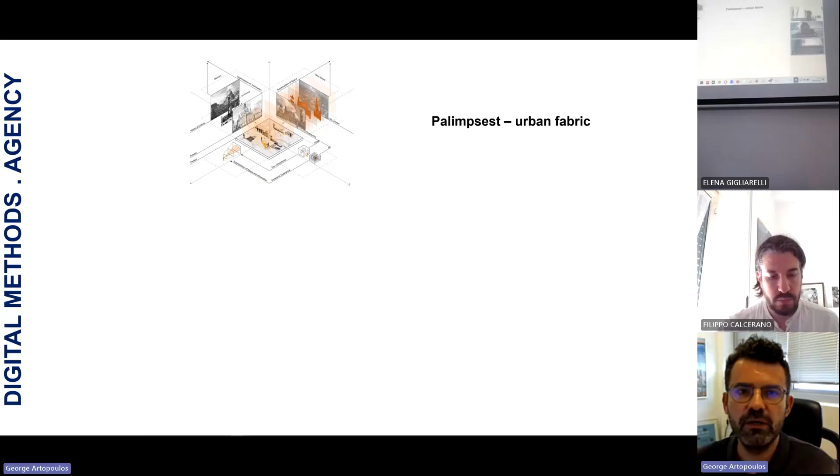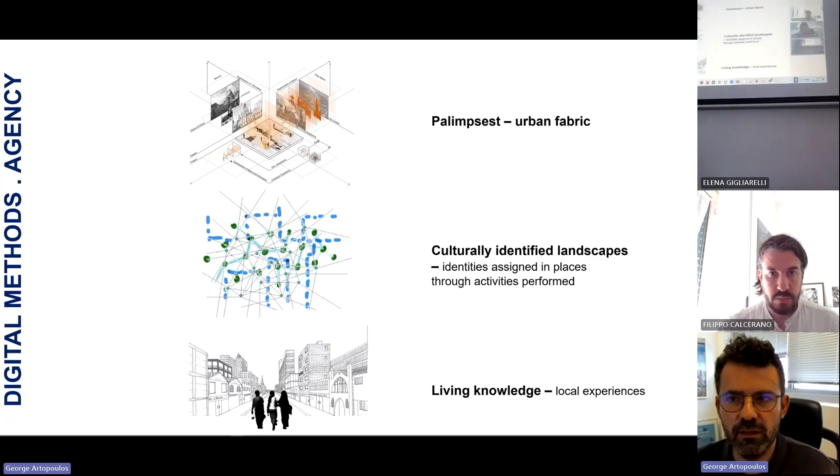In this context, at the Virtual Environments Lab, we work through three lenses, or three scales, and we operate to drive new transitions of our heritage-scapes through these lenses. The first is where we look at the historical and geometric conditions of the urban fabric. In the second, we aim to study culturally identified landscapes, while in the third, we focus on capturing local living knowledge.

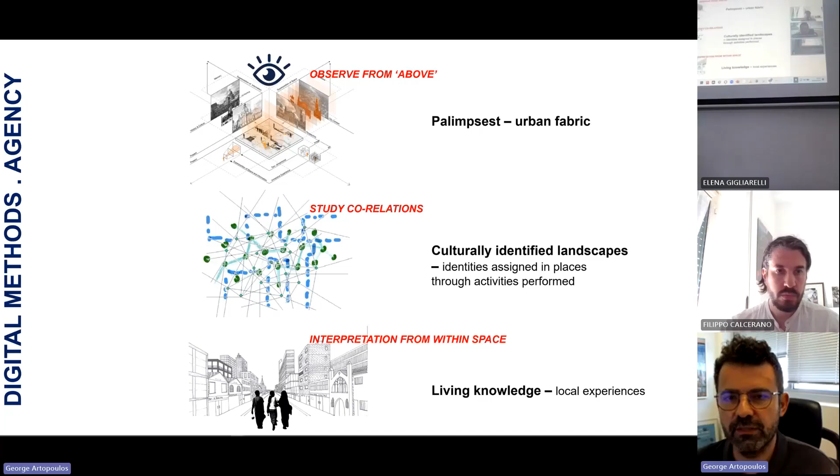To do so, in the first case, we observe from above. In the second, we study the establishment and emergence of networks of places and the interactions among stakeholders in space. And in the last one, we implement methods that assist interpretation from within space.

These three focal points drive our research, which is conducted in terms of the multi-scale observation of the urban fabric, the application of ICT tools to enable on-site participation for eliciting information, and the implementation of novel methods of co-design.

There is also a third thrust of activities about on-site co-design operations that I will skip today to focus on the first two. Of course, in everything we do, we understand that our study of built heritage spills over and engages understanding of the intangible aspects of heritage.

Hence, we have been working with Elena on the promotion and creation of the Archetico Working Group. I will start my presentation of these experiences specifically with an example of multi-scale observation.

Before sharing this example, I want to remind us that in the last several years, we can identify in the literature a shift in focus on policies in heritage — a shift of focus from looking at the object to looking at landscapes. This is very important for our research, because we propose that any documentation of a heritage object should include information about its context and environment.

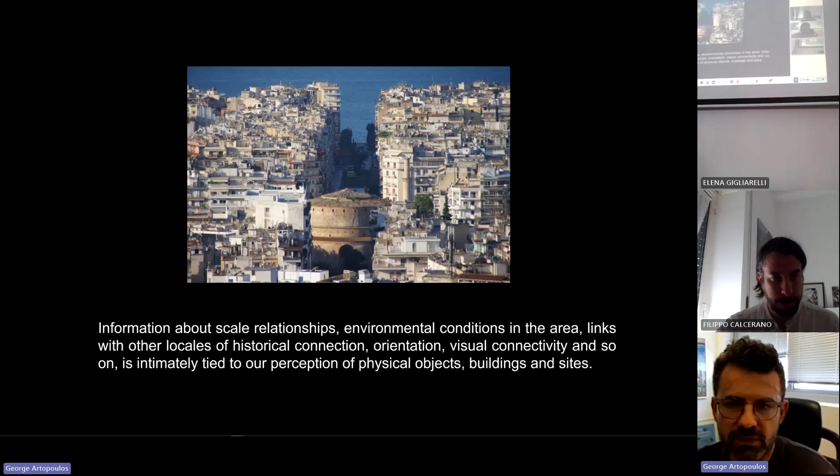Looking at the market today in terms of how we can facilitate this approach to studying heritage, in particular urban heritage within its context, we can see quite a few efforts in developing digital platforms that focus on 3D modeling and real-time simulation of urban environments. We, of course, fully embrace the concepts and ideas around digital twins in cities, etc.

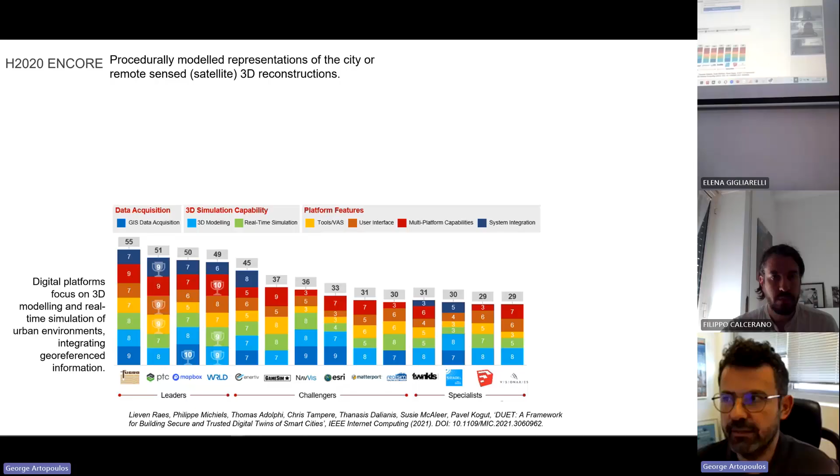There are other efforts that rely mostly on more procedural generation of the urban fabric using AI and remote-sensed reconstructions, as well as initiatives at European scale that focus on knowledge extraction and data integration in the context of city-scale reconstructions and modeling.

But we have identified that there is a gap in terms of how we can facilitate the authorities and all the stakeholders in monitoring heritage sites of bigger scale and historic neighborhoods. This is a very difficult challenge, and I will explain why further on.

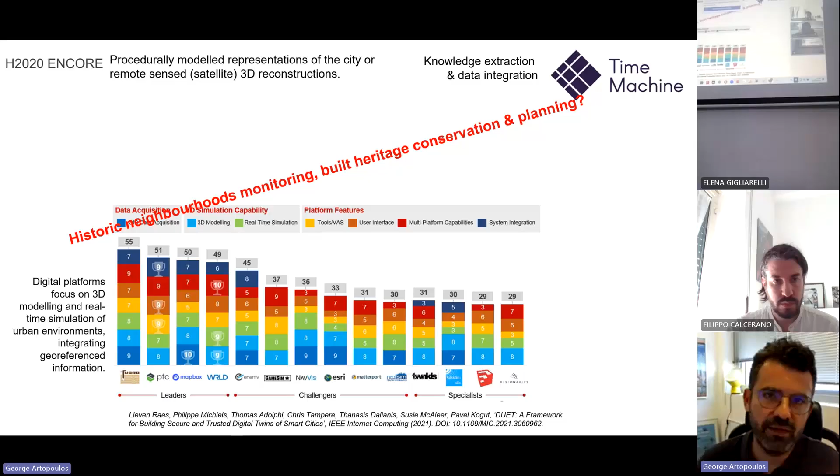In addition, we identify that there is a lack of quality open 3D data for city management, in particular about historic cities, as this has been reported in the policy paper, the white paper that was the basis for the European Collaborative Cloud for Cultural Heritage framework that was recently released.

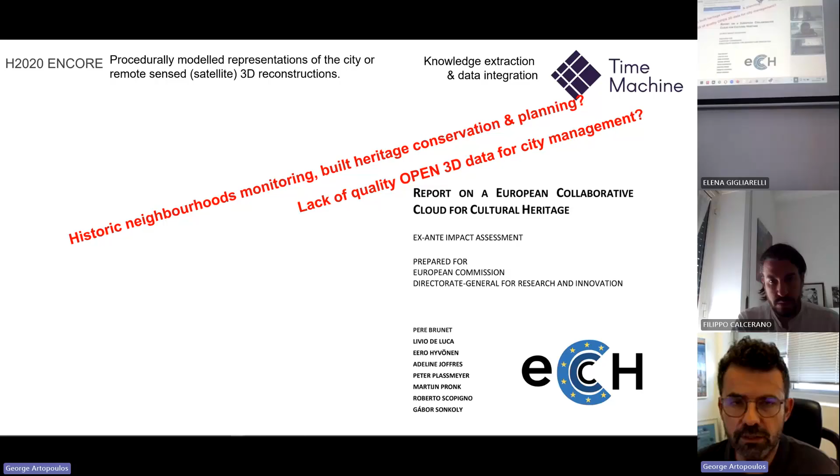If you will allow me, I will proceed to sharing with you this experience that I believe can be very relevant to the discussions you will be having in the following days in the workshop. So this is a reality — our reality here in Cyprus.

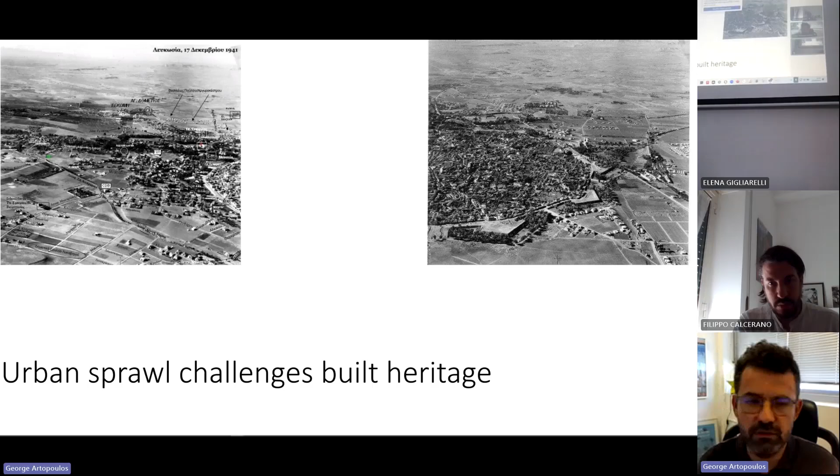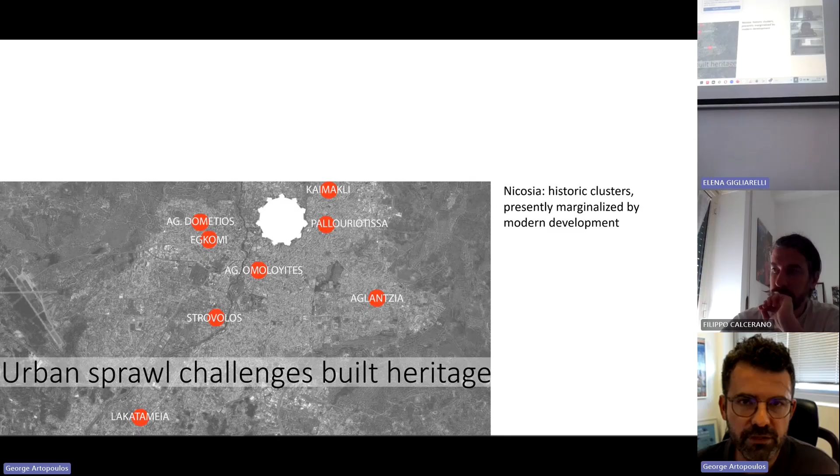What you see is the historic city of Nicosia, where the urban sprawl has introduced a lot of challenges in the management of the operations of the municipalities, of the public space, and of the building stock. All the red dots you see on the slide are satellite villages to Nicosia that have been integrated into the urban fabric of the metropolitan territory of the city with its expansion, with its sprawl.

We have been working with the municipalities to develop time-machine reconstructions of the sites to facilitate understanding of this expansion. But we have recently understood that if we want to really facilitate the preservation and safeguarding of this heritage, a different approach is required — one that would allow us to integrate many different datasets generated by different disciplinary backgrounds and bring together different scales.

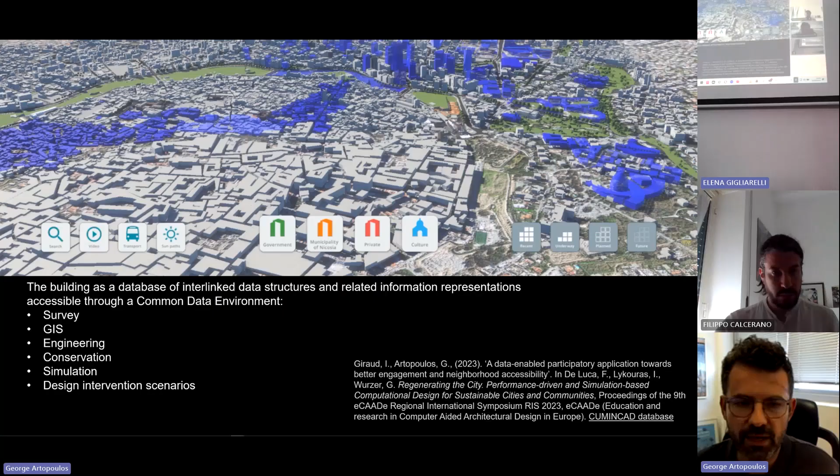This is the big challenge we are facing today: how to integrate these datasets, and how to bring together knowledge about building provenance for conservation, state analysis, renovation and reuse, data standardization, and the definition of data generation procedures through documentation and instructions, so that we can comply with any effort of standardization, and of course handle this digital information.

So what we did was bring together research organizations, SMEs, ICT companies, with the stakeholders of the city like the town planning and housing department of the government, municipalities, and the Department of Antiquities, together with professional bodies such as ICOMOS and ICOM, to talk together and understand how we could tackle this problem.

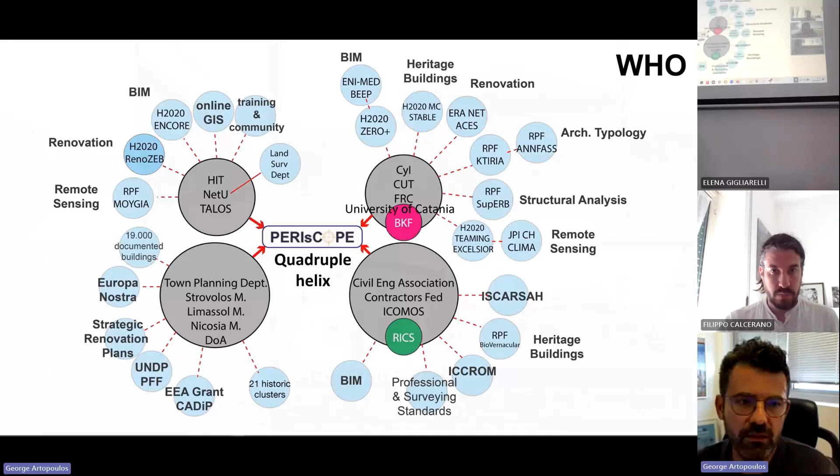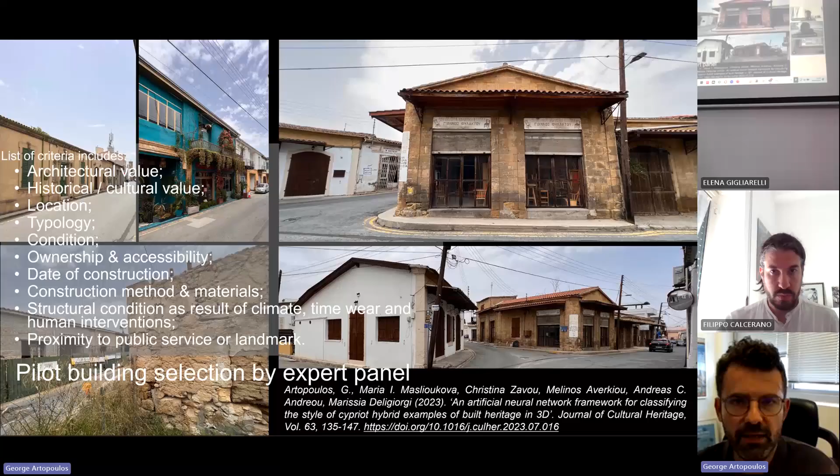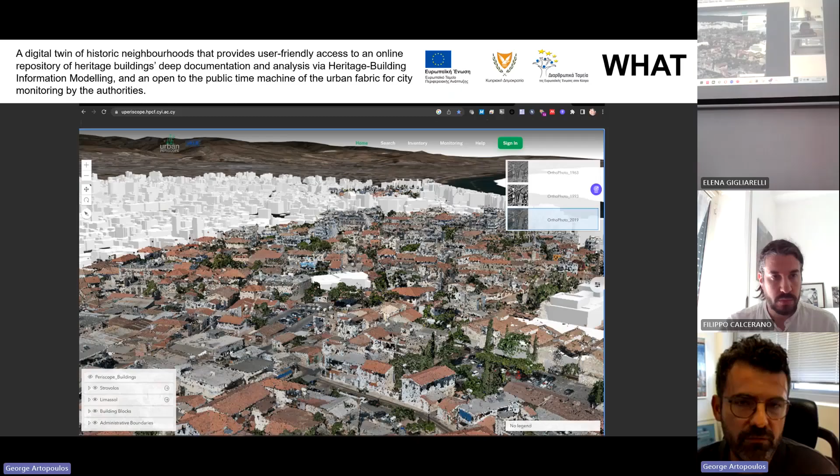We studied specific sites and buildings that were selected carefully to meet certain criteria, in order to experiment in the production of a very integrated portal — a platform, a screenshot of which you see here — that would enable authorities to monitor the development of the city in an open and easy way, and provide building owners access to knowledge about the value of their property, facilitating the valorization of heritage. This is a very important activity and initiative for cities like ours.

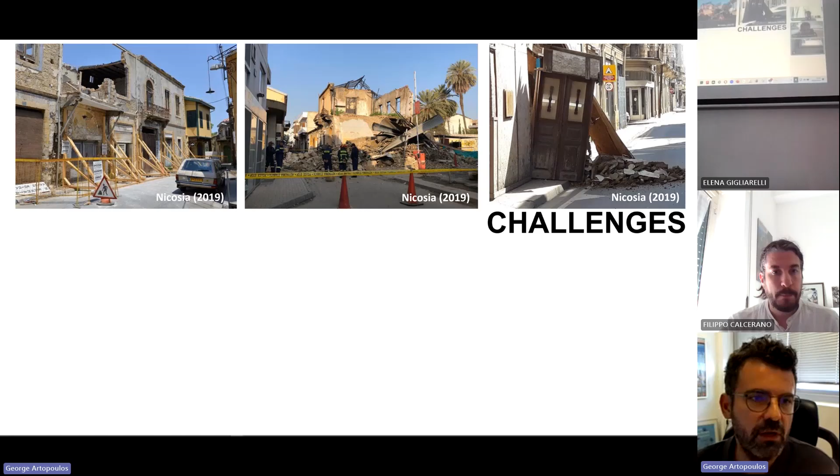You can see here the results of decay and neglect by human activities, and the impact of climate change, which is not very different to the results of an earthquake.

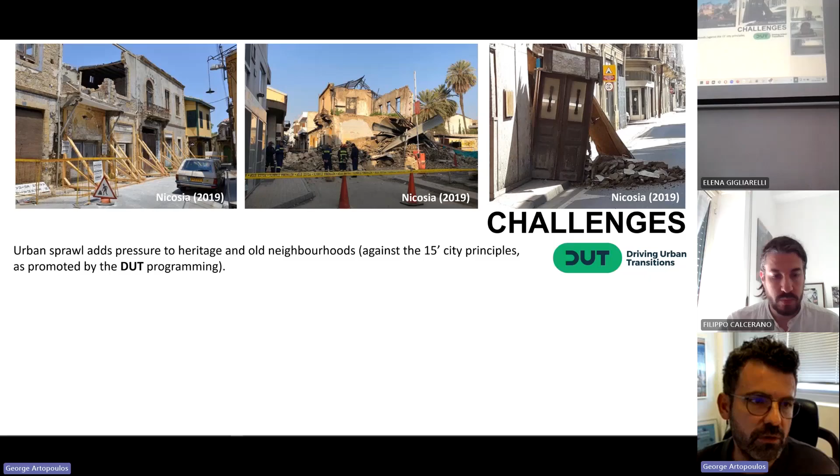As I briefly mentioned, the challenges we wanted to address regarded urban sprawl, the loss of heritage buildings by human neglect, climate change, and international real estate pressures, and of course the identified need for building renovation if we were to achieve the EU Green Deal goals.

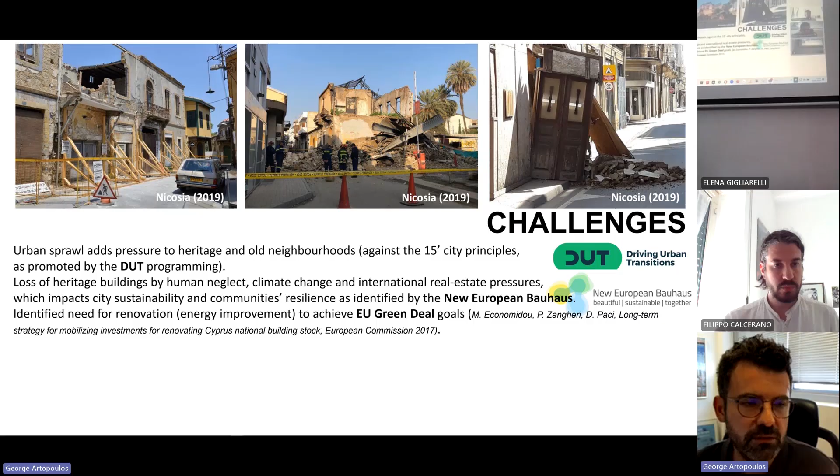In this environment we understood that there is a gap. The gap includes, first and most important, that authorities lack access to data and tools for monitoring, at least in our not very rich, so-called second and third tier historic cities, which do not have the resources to have a digital twin of their city and 3D cadastral data. Professionals also lack access to building and urban data, because it involves a lot of labor, it's costly, and they lack the know-how.

Even in terms of creating this platform, one would identify challenges with regards to scalability and sustainability, as any such tool must be user-enabling in everyday operation. And of course, most important, user acceptance of the platform, so that any target user group would not be afraid to use it, including concerns over data ownership, privacy, and security.

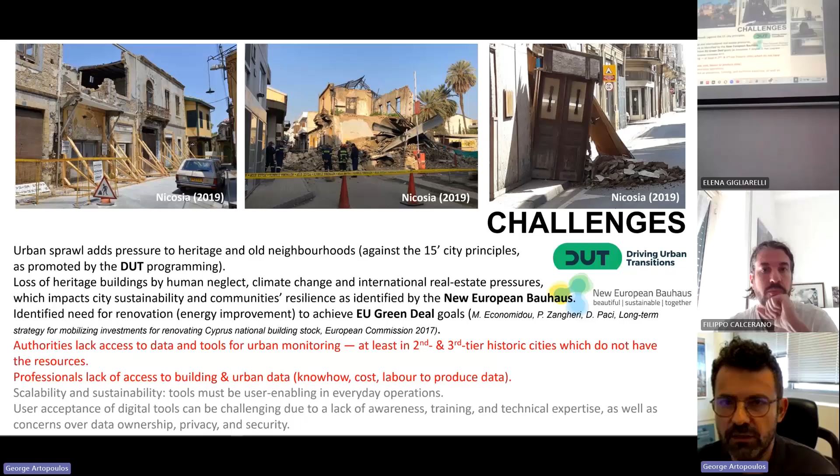So we overcame these challenges by producing a series of requirements for restoration and renovation, and guidelines for the users of this platform. We made sure that we would produce quality data sets respecting international standards, and we would also facilitate multidisciplinary study of the heritage assets, bringing this knowledge together with information of different scales.

And I will show you in a while how we did this. A key point for us was that we set up the whole process so that we would incrementally develop this platform as a tool together, through co-design sessions with the identified target user groups.

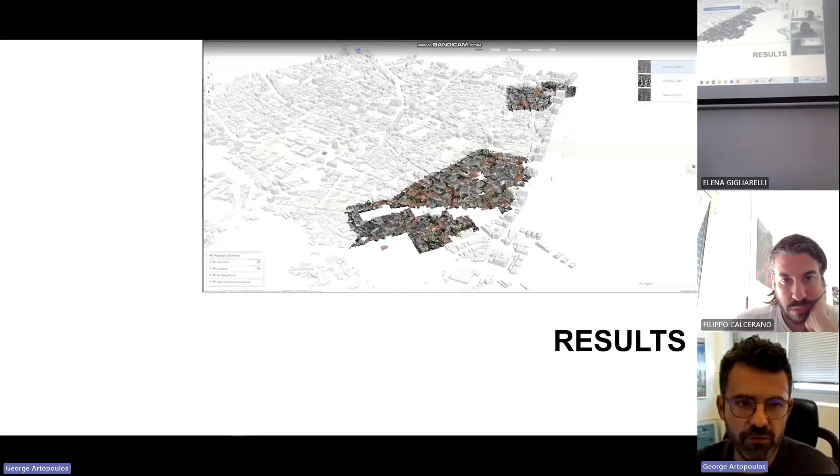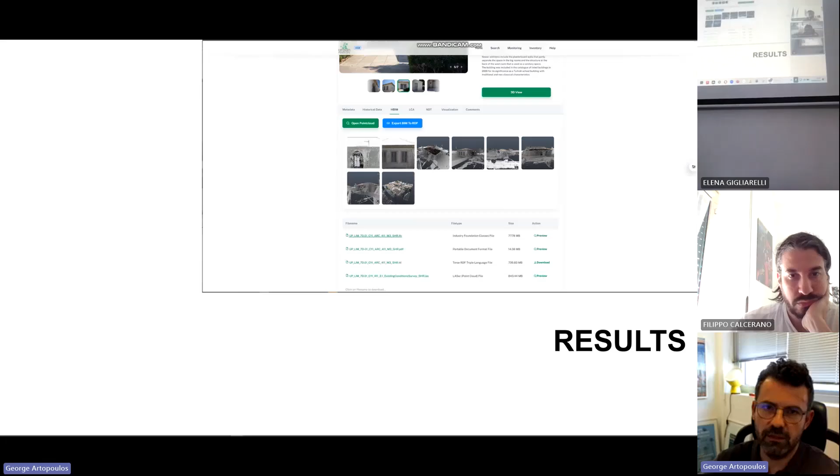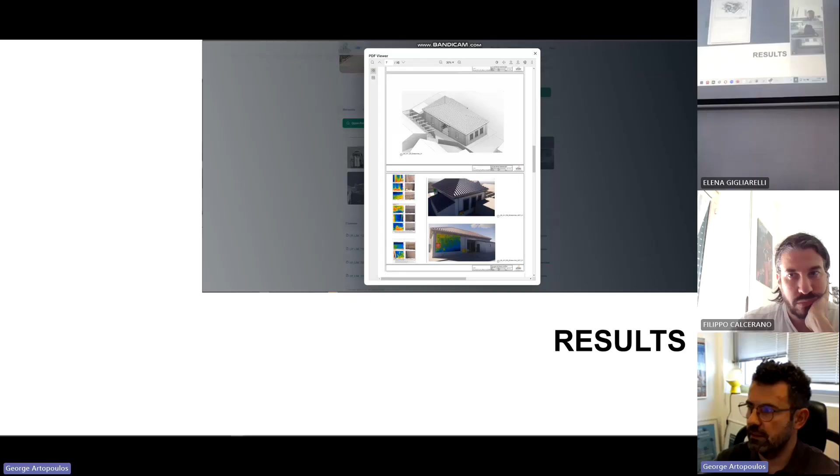I will quickly take you through this platform now, through this pre-recorded video. The platform is available online. You can see here how a user can select a building asset from within a 3D GIS environment, a representation of the neighborhoods, and they can access information about the building conservation state analysis, and a series of documentation of the building, and the necessary drawings that any architect would require for the study of the building.

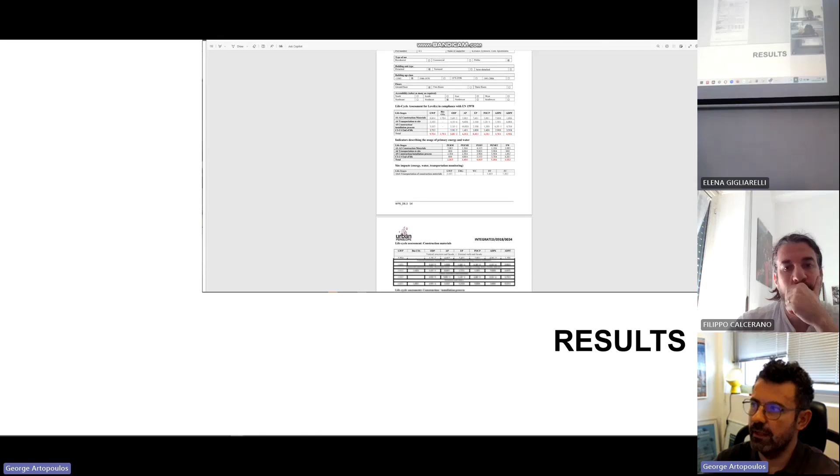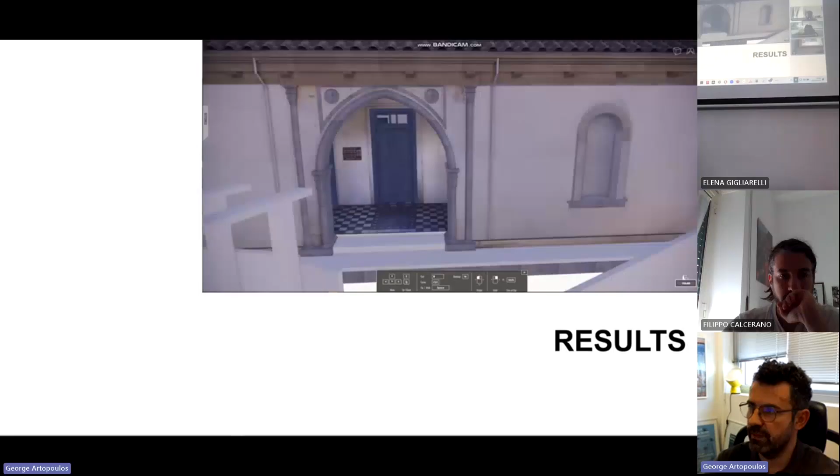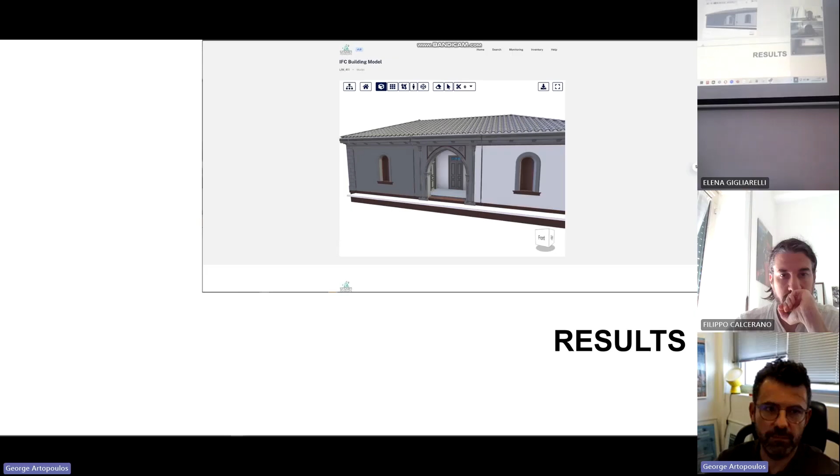As well as access to the results of non-destructive testing, and different versions of visualizing the asset through different interfaces. This is Enscape, for example, which allows the user to change the time of day, and therefore to see the impact, or show clients the impact of lighting on the proposed materials, and of course access to the IFC file.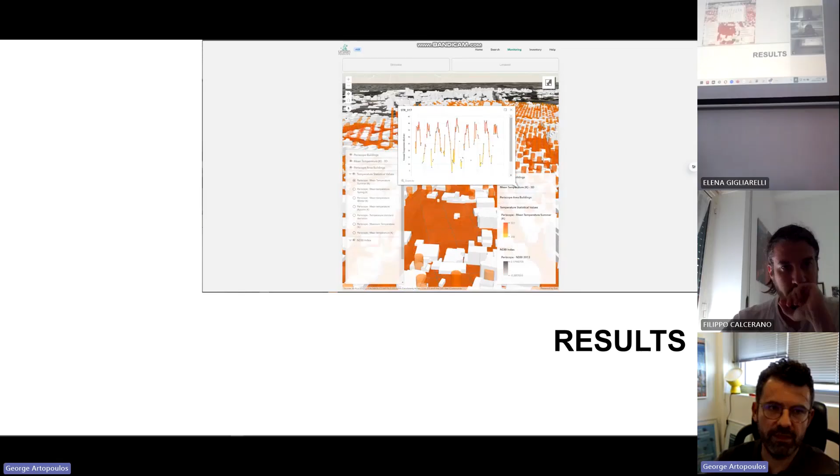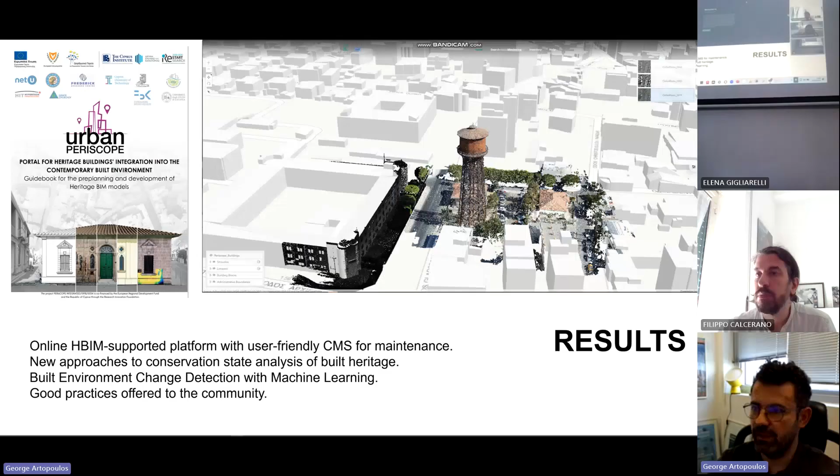You briefly saw that we included a comments section in the platform, so that the public can add information and share information about specific buildings. And what you see here is the visualization of information we collected through remote sensing about land surface temperature, about the neighborhood and the building, as well as documentation of the whole process, and the playbook we produced with guidelines and instructions for generating the data sets and uploading them to the platform.

As a result, and trying to connect with the previous presenter, we succeeded in attracting the interest of the municipalities and the town planning and housing department, who were partners in the project, and are now convinced of the value of this approach, using HBIM in an integrated workflow that is accessible and available for their officers through a simplified interface for monitoring purposes, for the whole process of getting permissions for building conservation and renovation.

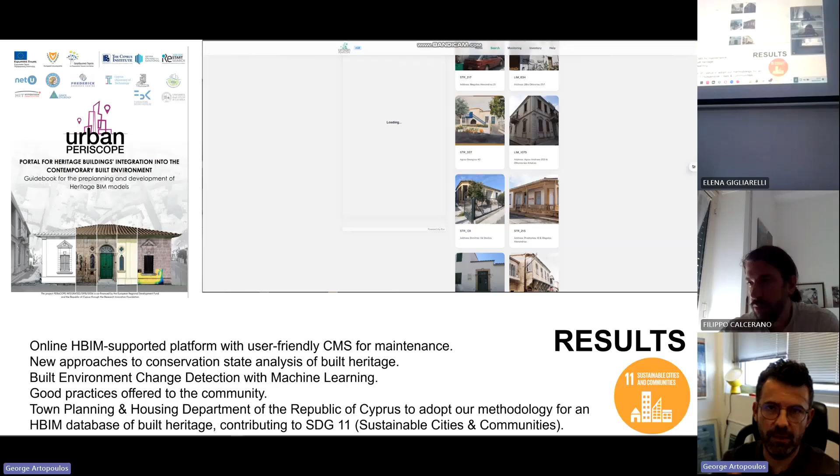And they are in the process of enriching this platform with new data sets. And of course they have started discussion about updating their policies and operations to see how they could include BIM files in the whole building permission process.

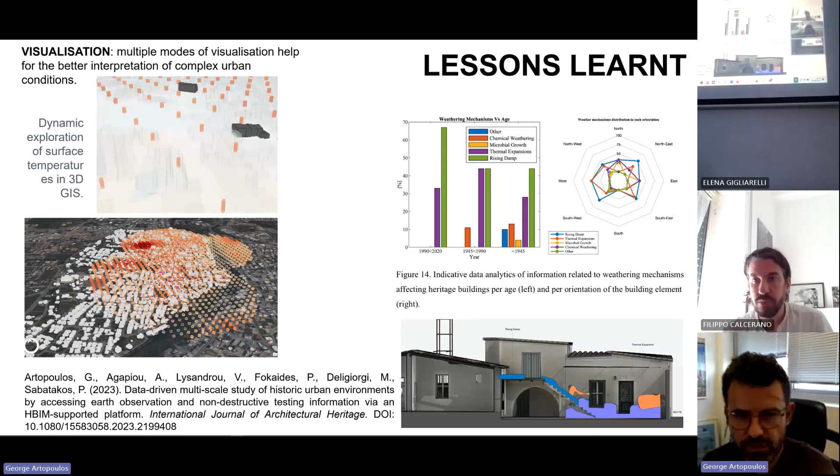Lessons we learned through this include the value of visualization, that multiple modes of visualization can help for better interpretation of complex urban conditions. You can see here the bringing together of environmental data from the neighborhood with the results of conservation state analysis and the interpretation of specific issues identified on the structure of the building.

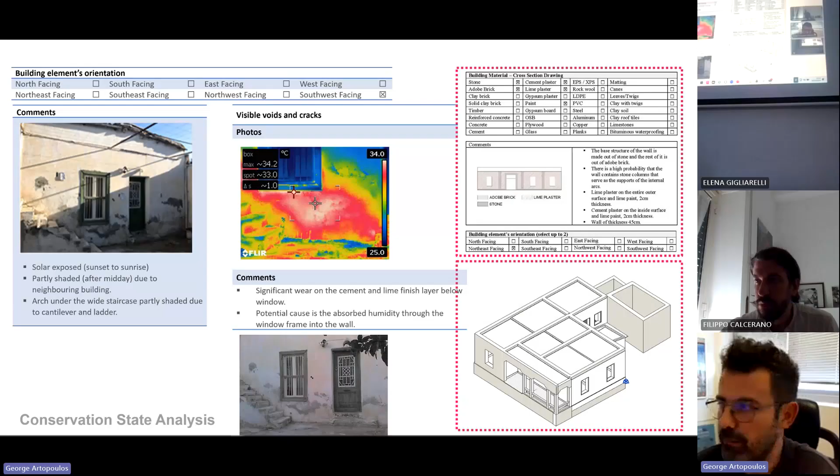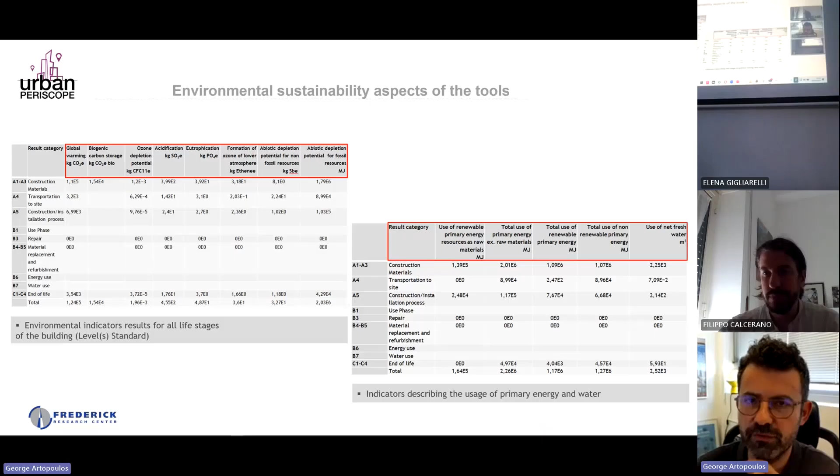And of course, for doing that, we implemented all the necessary practices for conservation state analysis, as well as experimenting with a better understanding of the environmental impact of heritage buildings, which is a very difficult task, to come up with a life cycle assessment of heritage buildings and their materiality and materials.

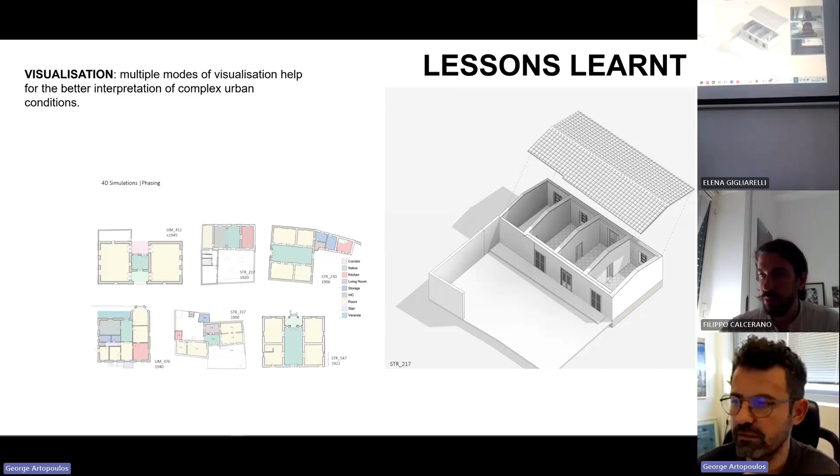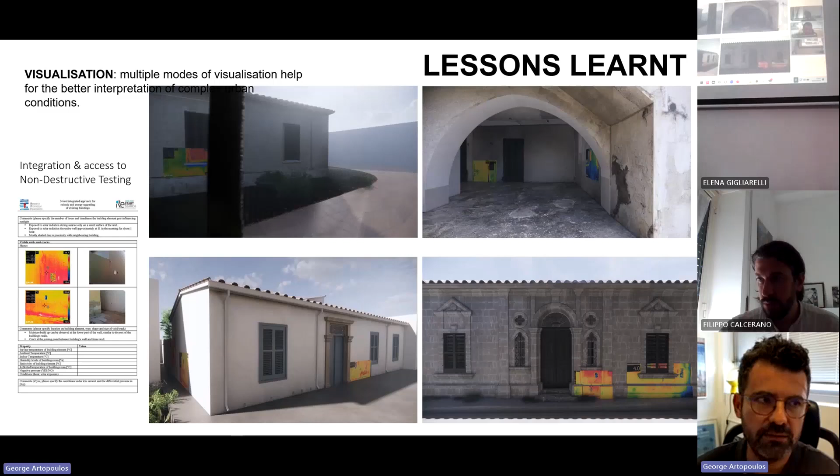Again, in terms of visualization, phasing of the buildings, we provide this information to the users of the platform, and the various ways that any one of these building assets can be visualized. Just some screenshots. Moving to the urban scale,

another lesson learned regarded the importance of chronological transformation and monitoring and understanding chronological transformation through this time machine function that helped us better understand change in the urban environment.

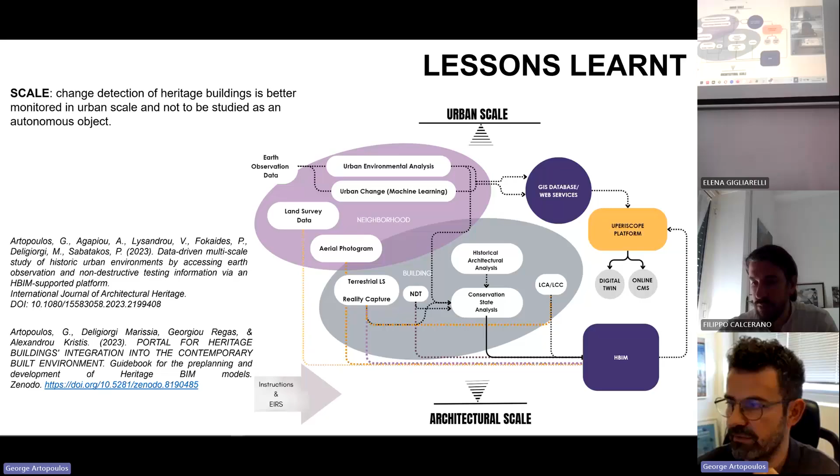Another lesson learned regards the value of bringing together these different scales of analysis and study of heritage, the urban with the building scale, and the integration of all the various data sets that were produced through a well-defined workflow that bridges and crosses all the scales that I mentioned.

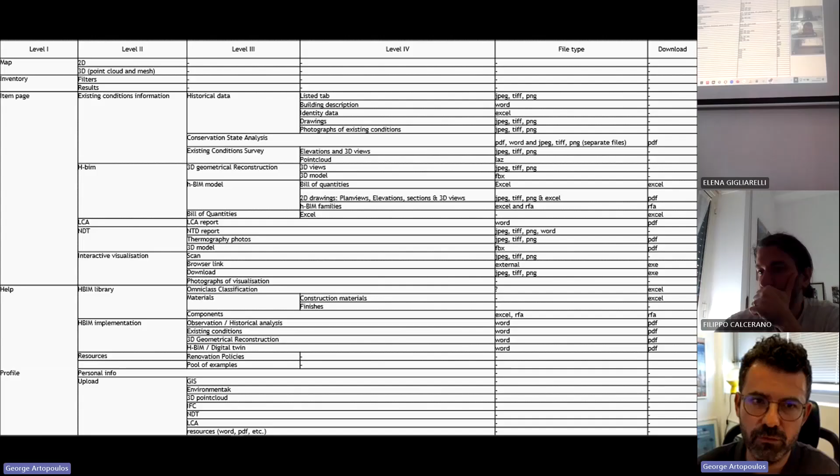As we were doing this, we started addressing the issue of integrating all the various data that we were producing with their relevant metadata. And this, of course, is something that is very relevant to the workshop and to the operation of Archetypo in the future. And we really hope that we will be able to develop this

further. Another experience very important for us was the value of creating a knowledge graph about the various assets and knowledge and information that we were producing, and how these could be linked and connected between them so that we could bridge the scales.

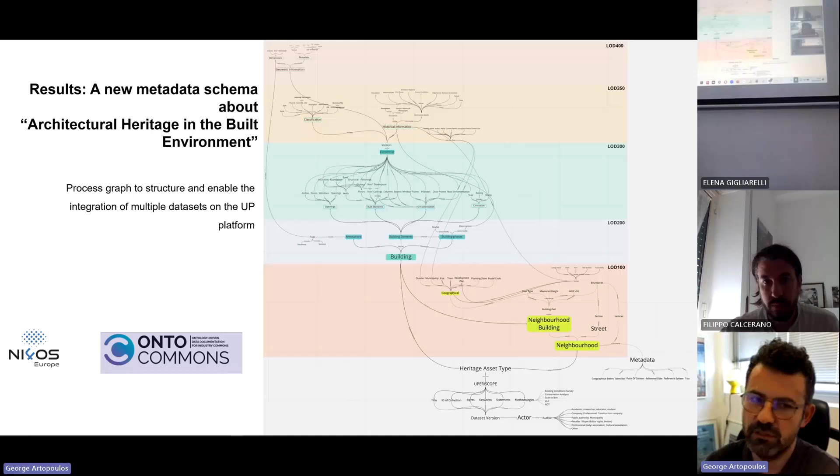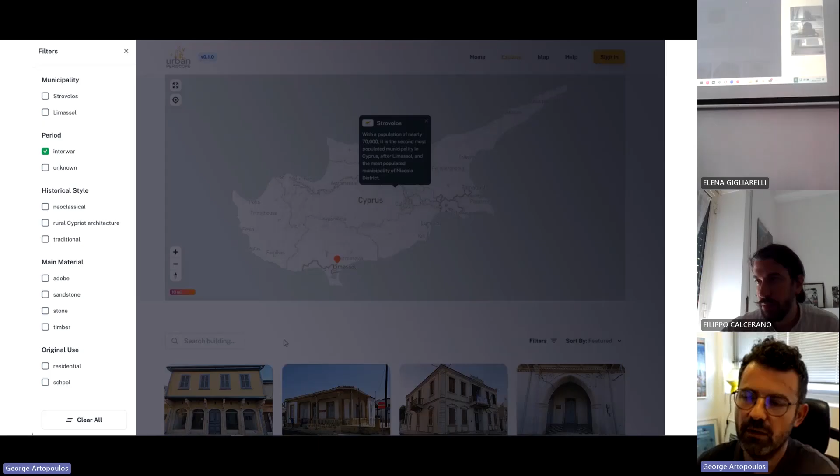And later, as you can see on the screen, in terms of LODs, which helped us a lot, of course, in then having data sets that were annotated and we could easily query through the platform. So we could query the assets according to style, material, etc.

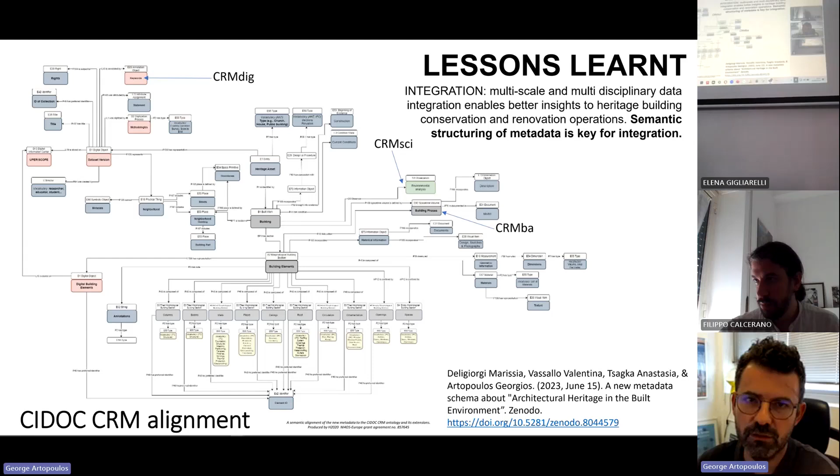And in the back end of that, of course, it was very important for us to start testing how we could semantically structure all this metadata, respecting and following specific standards. And I want to repeat one of the remarks of the previous presenter about the importance of vocabularies in whatever we are doing, that would allow interoperability and data sustainability.

And also very important, another lesson learned was the value of really engaging whoever we consider as our users for whatever work we are producing, in the whole process of developing the method. And this is an example of how we went about the development of this platform.

So we built, based on some specific scenarios, with the support of the ICT SME company, the alpha version of the tool, the platform, and then we had two rounds of iterations of it, where we collected and implemented feedback of the groups that we had identified as our audience, as our users, through co-design sessions.

And this helped us a lot in really transforming the original aim of the platform, which was to provide features about building a catalog, to provide access to interactive visualization modes, to help the authorities and stakeholders in monitoring buildings and heritage assets and whole neighborhoods, and to handle the information through the various resources that we were expecting to be onboarded on the platform.

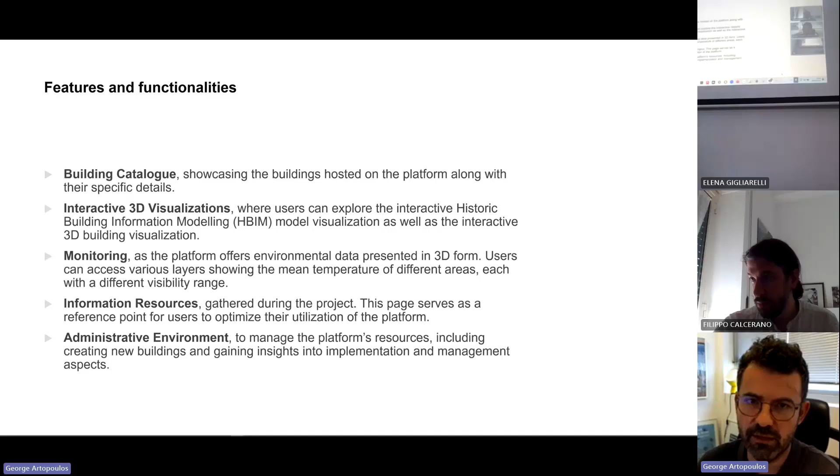And of course, most importantly, for the maintenance and the sustainability, the future sustainability of the platform and the work that we were building, the administrative side of it in the back end, how this could be handled.

So we managed to meet these goals through these co-design sessions. The feedback that we got and delivered to the ICT company from the users was pivotal, was very, very crucial for them to meet their needs and their goals, and to ensure that what we would develop would be easily maintained and would be a tool that the intended users would continue using.

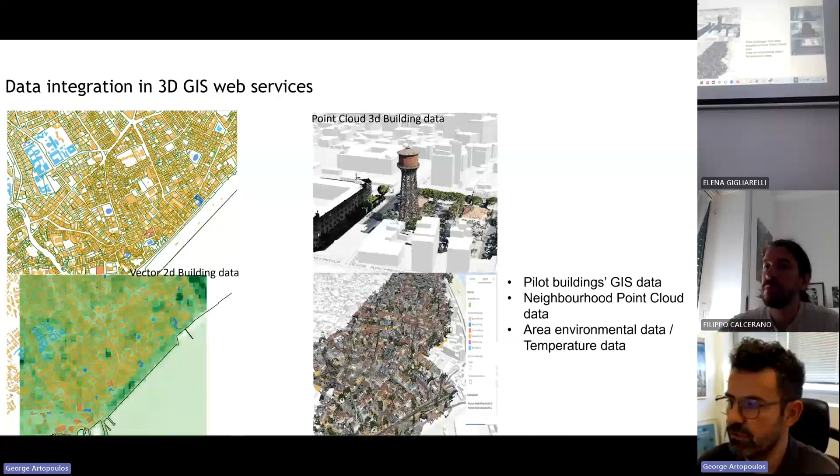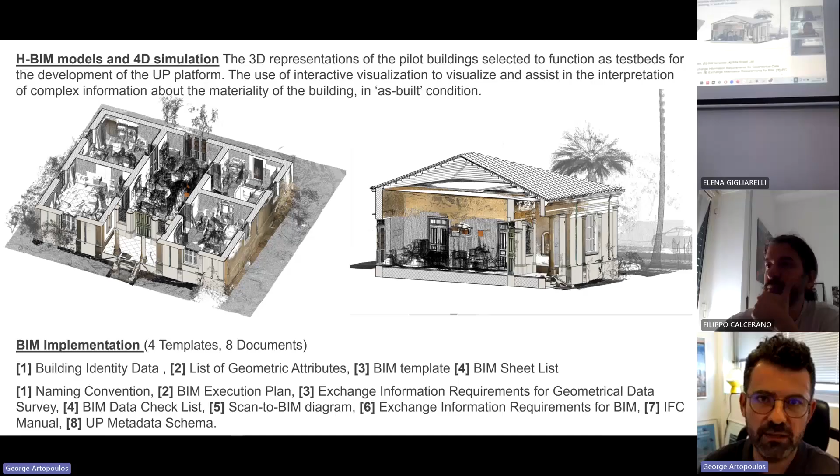These are some screenshots of the various data that were integrated in the platform, in terms of broader fields of information and knowledge, GIS, of course, the multiscale 3D documentation, and the BIM implementation, with the various documents and templates that were produced exactly to facilitate professionals to continue delivering data sets of the same quality that would be compatible with the platform, and therefore could be easily uploaded to it. And all this is, of course, openly published.

And now, quickly, I will move on to the next scale, which I think is also relevant to the first presenter, about the future of how the results of our workshop could bring in some new ideas to the municipality there, which I think you will find interesting.

So what I will be showing you was produced in the context of Daria again, with a collaboration of COST Action. In terms of handling and engaging with local stakeholders to involve them in the whole process of knowledge elicitation, we are operating with this data lifecycle, which is basically a spiral that brings together and combines expert knowledge with local knowledge, like memories of local communities about a site, and integrates all the other digital management information steps and features.

So we started approaching the issue with a qualitative analysis, where through micro interviews and work with the locals, we started building narratives of stories. If you read the boxes, you'll see it's a qualitative analysis of very clear quantitative aspects of microclimate control that the patio, the courtyard, provides to the experience of inhabiting this space.

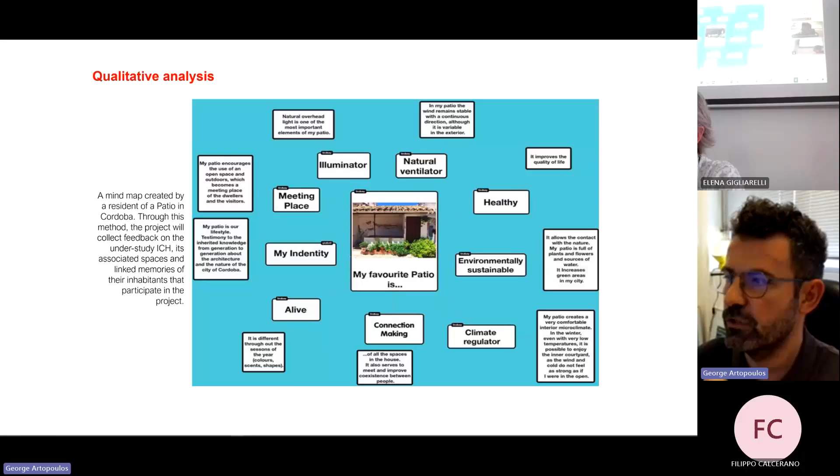These experiences and the connectivity between this network of patio houses—we wanted to capture experiences of local people who still live there or remember living there, in order to create a baseline of information that all scholars and researchers could reuse to develop more articulate and elaborate studies.

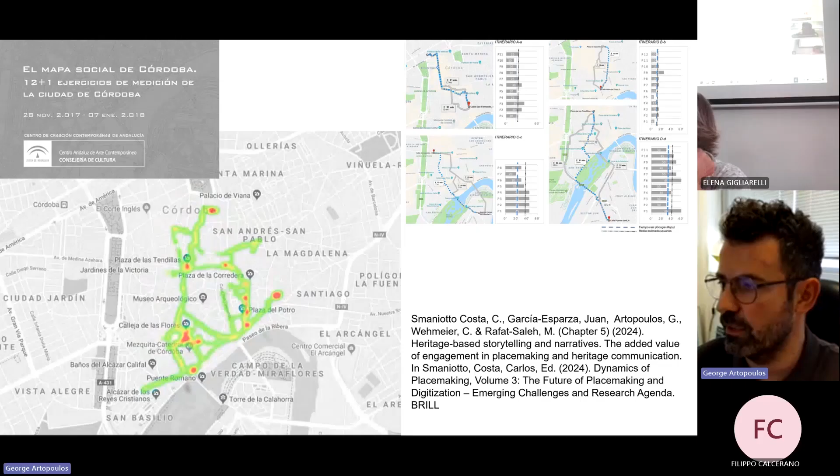So we organized events in two different years with students from the local universities, and we provided them tools to walk around and start doing mini and micro interviews with the inhabitants, collecting all this information on site, and managing it along with annotated assets such as photographs through an online system that would help us bring all this knowledge together.

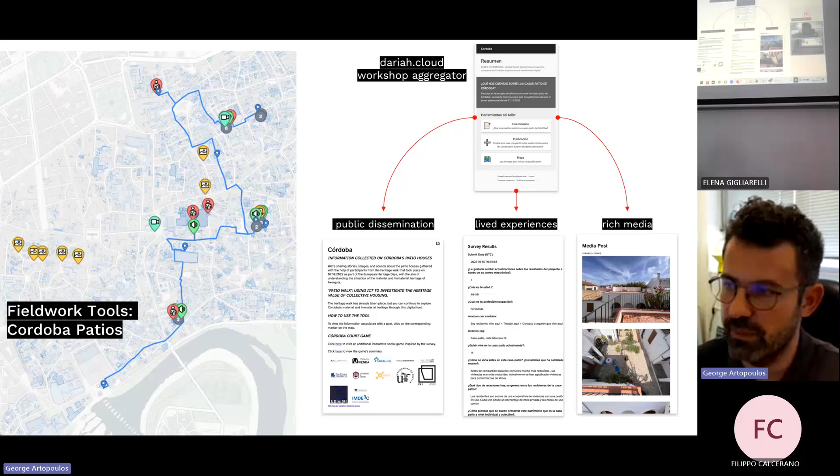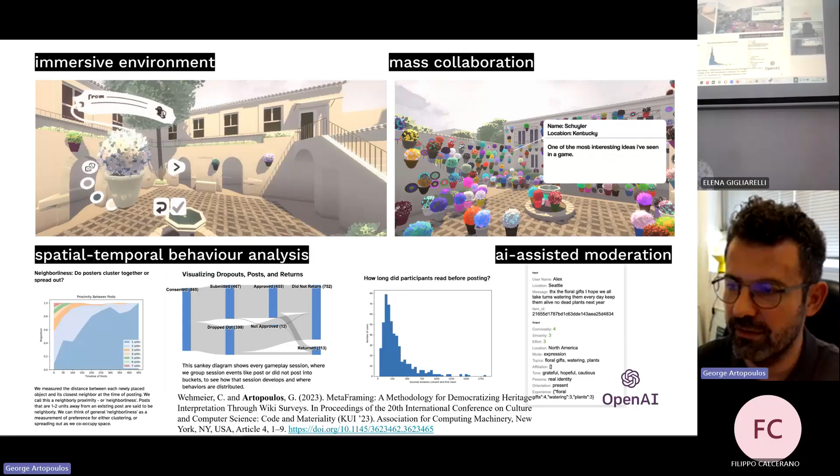And of course, we moved even further in developing more innovative approaches to engage with wider audiences, such as online video games, using the same approach but also including augmented reality in the process.

We applied this again in the context of DARIAH, in another historic site, the Cantieri Culturali alla Zisa in Palermo, which I'm sure you all know, or have probably been there. In that site, there is one leftover space that is without a roof.

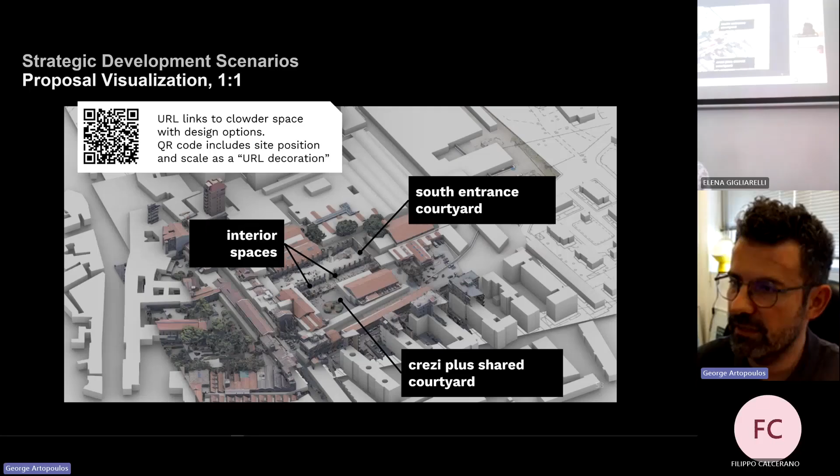In the context of this workshop, we documented the site, and we started using augmented reality as a tabletop co-diagnostic tool to discuss with local stakeholders about their vision of this site, how this building could be renovated, and what it could become and be used for.

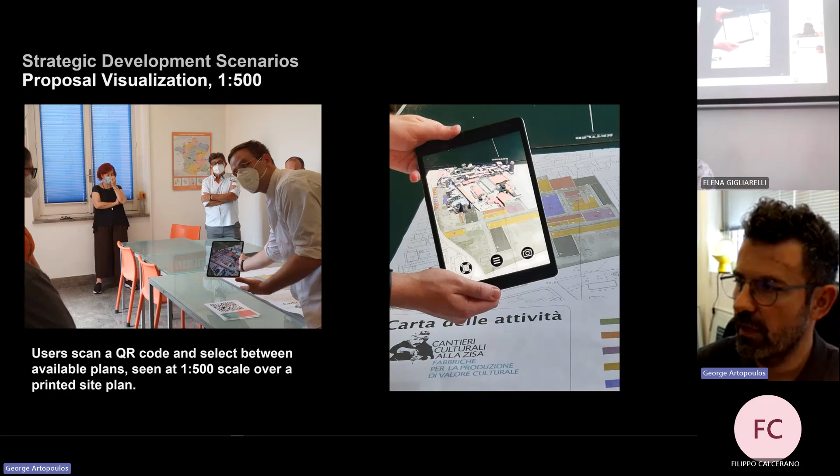We then illustrated some of their ideas and provided an interface for them to walk around the site and interact with their suggestions, helping us collect this information, visualize it, and facilitate the whole co-design phase.

I will finish with our wish and hope for Archetipo: that we will bring these knowledges together—the very technical knowledge of the documentation of the provenance of the building and its geometry—with the lived knowledge of the people, the custodians and bearers of cultural heritage, and that we will develop the necessary practices and tools offering new insights into the integration of these worlds.

We are very happy to be part of the Horizon Europe Atrium project, in the context of which we hope to facilitate the work we will be developing in Archetipo, and to share it with other communities outside the area across Europe.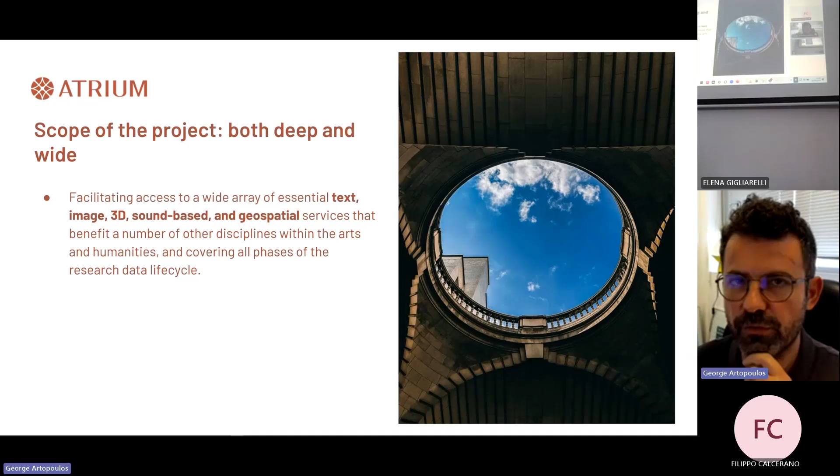In particular, in the project we are leading a task on HBIM workflows and a demonstrator, and I hope we will be able to continue this discussion throughout the duration of the project, so that we can share knowledge and experience. Thank you very much for your attention.